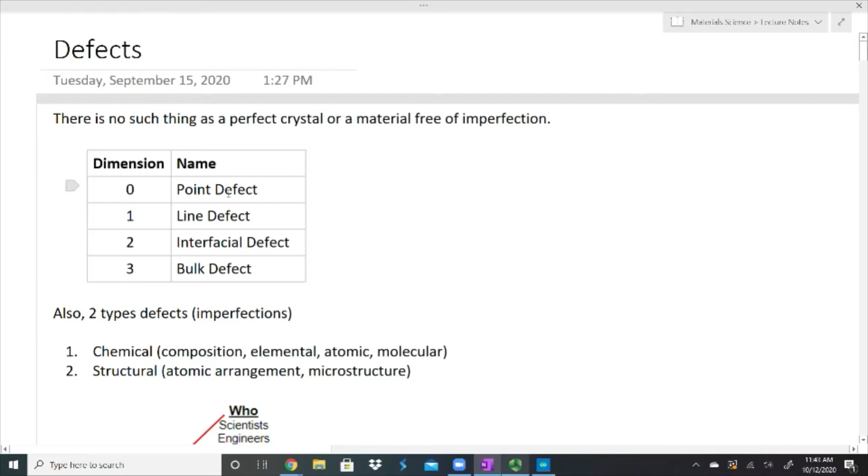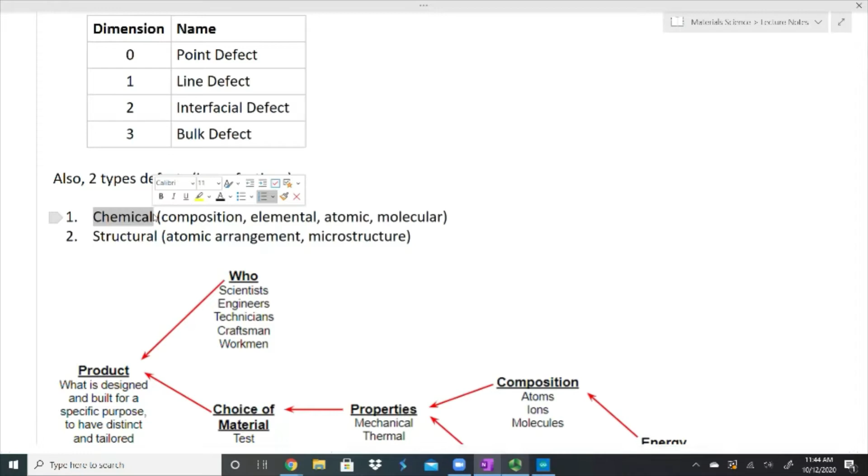There are 4 dimensions of defects that we're going to talk about. 0-dimensional are called point defects, 1-dimensional are line defects, 2-dimensional are interfacial defects, and 3-dimensional are bulk defects. Within these, there's 2 other types of defects or imperfections, and those are ones that are chemical. That would deal with the composition, the element, the atoms that are used, the molecules that are involved, and there are those that are structural, talking about the atomic arrangement or the microstructure.

So we're going to go back to this picture again. We have the composition of the atoms is important, and that's for a material in general, along with the atomic arrangement. But these also play a huge role in defects as well, not just the material in general, but also in the defects of the material. We have to talk about the composition of the defect. We have to talk about the arrangement of the defect. And again, all these things really come back to energy.

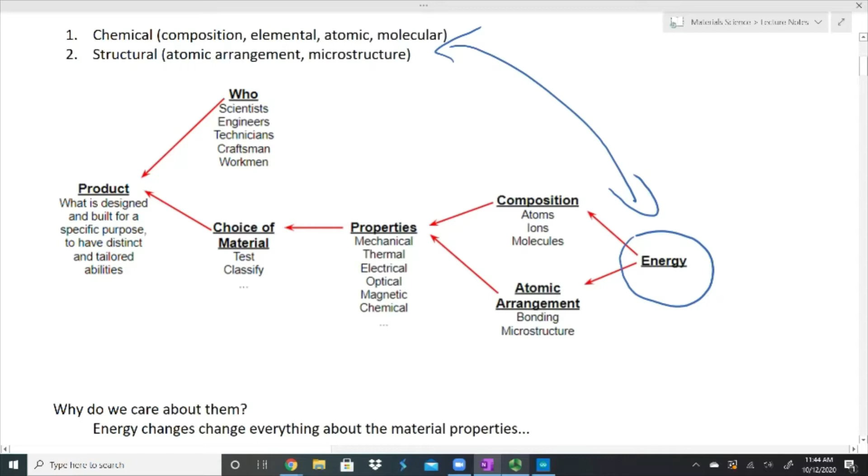The defects, whether they're chemical or structural, will change the energy of the material, which will change how the material properties work. And that's why we really care about them, because the energy changes everything about the material. A lot of times when you think about defects, you think, oh, those must be bad. But defects aren't always bad. So the more we understand about defects and how it changes the energy of the material, the more we can actually add imperfections or defects on purpose. And this gives us specific tailored properties.

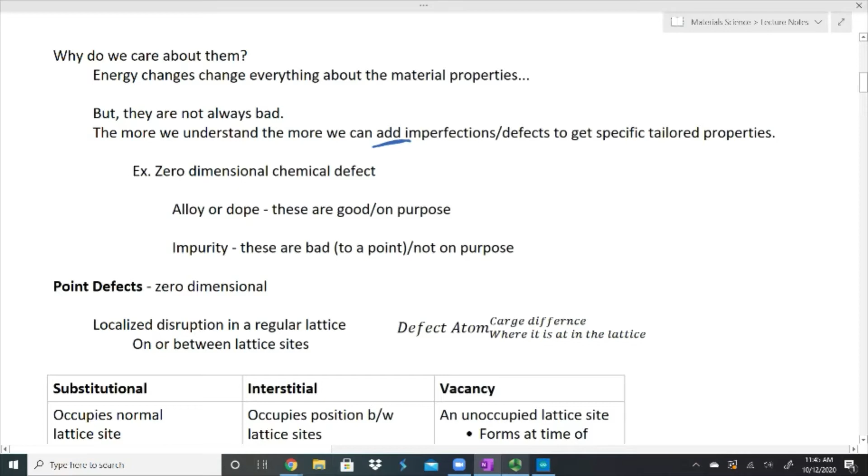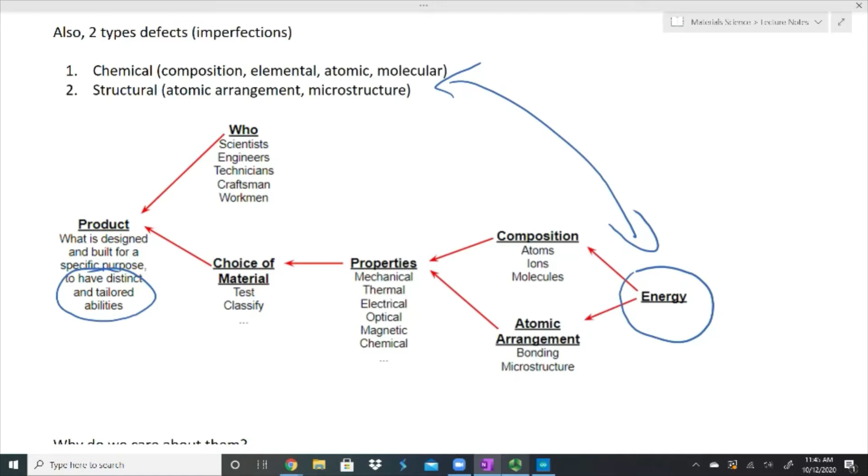Again, that comes back up to this picture about what we really want. We want very specific things out of it. When we design any type of product, or when we design a material, we want things to be very, very, very specific. An example of this, and I know that we haven't gone into it yet, so you might be unsure about some of these things that we'll be discussing in this example, but you can always go back to this and think about it once we have discussed it.

An example would be a 0-dimensional chemical defect. A good version of that would be something that's alloyed or doped. We do this on purpose. We alloy metals. I can have a metal and sprinkle in a little bit of some other atom, a different type of metal, and it's going to change the properties. It'll change everything from the melting point to its strength to its electrical properties. It changes everything.

An impurity, that is when we say that it's bad. We try not to do this. We try not to do it on purpose. And depending on the material, there might be a level of impurity that might be okay to have up to a certain point. But again, when you're talking about so many different atoms throughout an entire material, you're going to have some type of imperfection. You try not to. They're not on purpose, but you're always going to have some.

All right, so let's actually talk about what some of these things are. So the first thing we're going to talk about is point defects. Point defects are 0-dimensional. They are thought of as a point. They're a localized disruption on a regular lattice, or it sits between lattice sites. And I'll draw a couple pictures of that in just a minute. I did want to very quickly talk about some notation. When you talk about a 0-dimensional point defect, what you do is you write out the defect atom, and then as a subscript, you write where this is on the lattice, and then as a superscript, you write whether there's some type of charge difference involved.

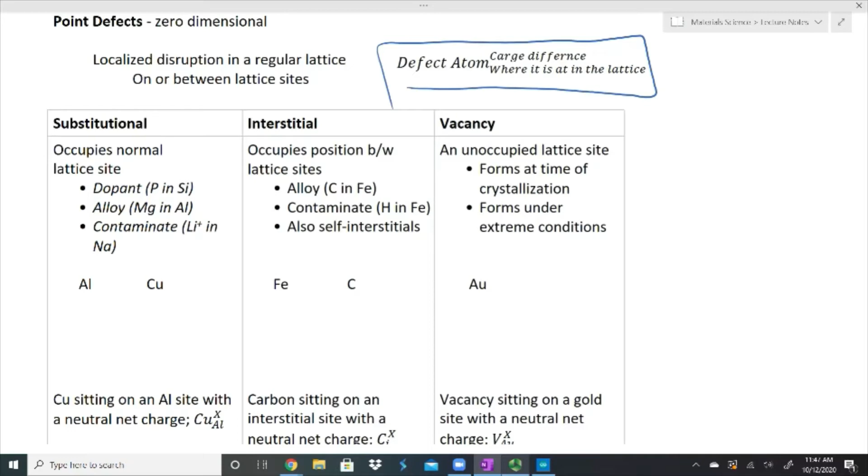So let's talk about substitutional first. A substitutional means that this is going to occupy a normal lattice site. It's not like we're adding anything in here. It's going to sit on a normal lattice site. This would be our dopant or an alloy, or in the case of our example above, an impurity, a contaminant. And so I have a couple things here for the dopant. We might have phosphorus into silicon, an alloy might be magnesium into aluminum, or a contaminant might be lithium into sodium.

All right, so the example that I'm going to show here, I'm actually going to draw one. We're going to have aluminum, and the aluminum I'm going to draw just as an empty circle, and copper I'm going to draw as a filled circle. And so if I have an aluminum lattice, this is a pure crystal.

But if I were to substitute any one of these aluminums and put a copper in instead, this material would still be aluminum. It's mainly aluminum. It does have a contaminant or an alloy or something in there. There's something in there that's not supposed to be for a pure aluminum lattice. And so what we would say is that a copper is sitting on an aluminum site with a neutral net charge.

So again, if we're talking about the notation here, we have our copper atom. That is the main thing that we're writing here. The subscript is where it's at. It's at an aluminum site. And there is no change in charge because a copper atom is neutrally charged and an aluminum atom is neutrally charged. So there is no charge difference. So that's substitutional. Strictly, we just replace one for the other.

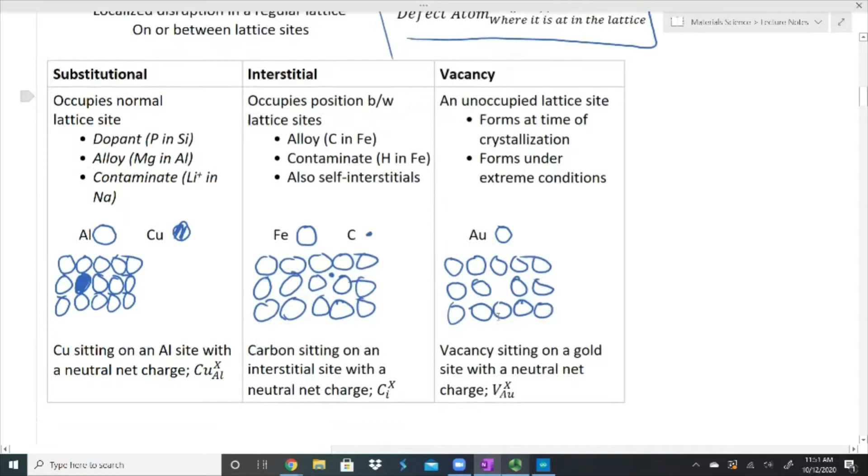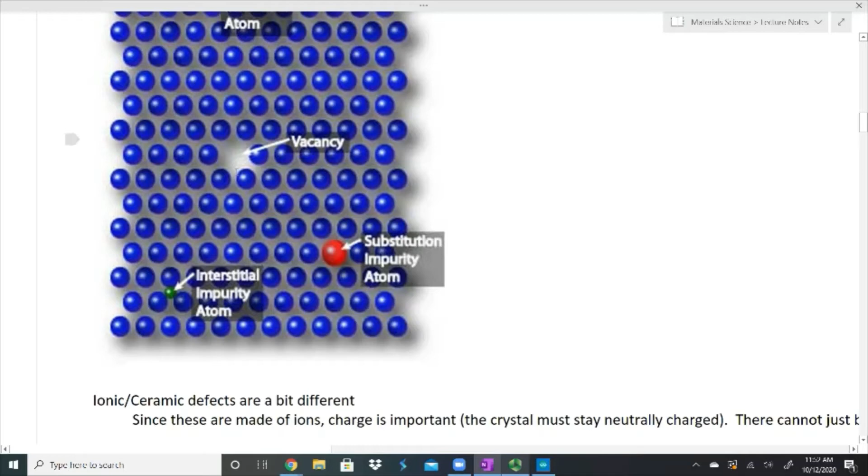In the middle, we have our vacancy. There should be a blue atom there, but there's not. And up here towards the top, we have our self-interstitial. It's still a blue atom, but we've wedged an extra one in here, and so it's not necessarily sitting on a perfect lattice site. And it might be hard to see, but if we try to draw a line through any one of these directions, I could draw a line this direction, which works out. But if I try to draw one up this way, we see that these aren't necessarily lining up. There's some stuff there that are not in the proper spot. And so we have some stuff not sitting on a lattice site. That would be an interstitial, and because it is the same atom as the rest of the lattice, it is a self-interstitial.

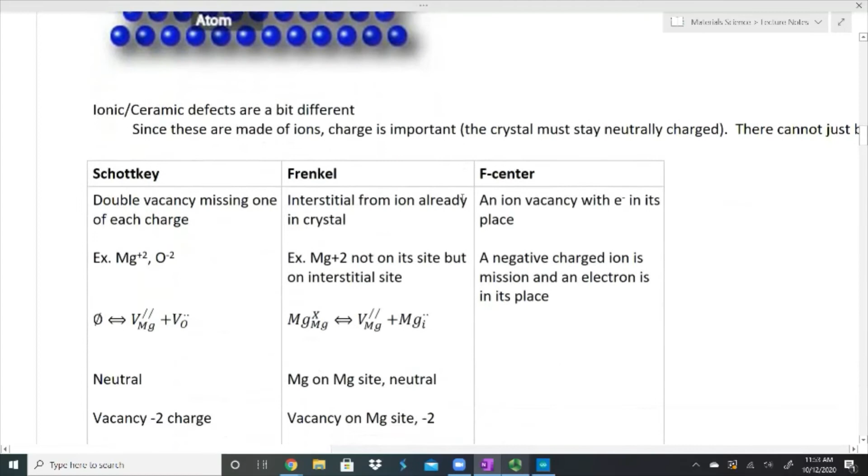They're pretty simple in metals. If we're talking about ionic materials or ceramics, they're a little bit different. We're going to just go through this really quickly. I'm not even going to discuss the notation necessarily. You can look at this notation. We have the same type of things.

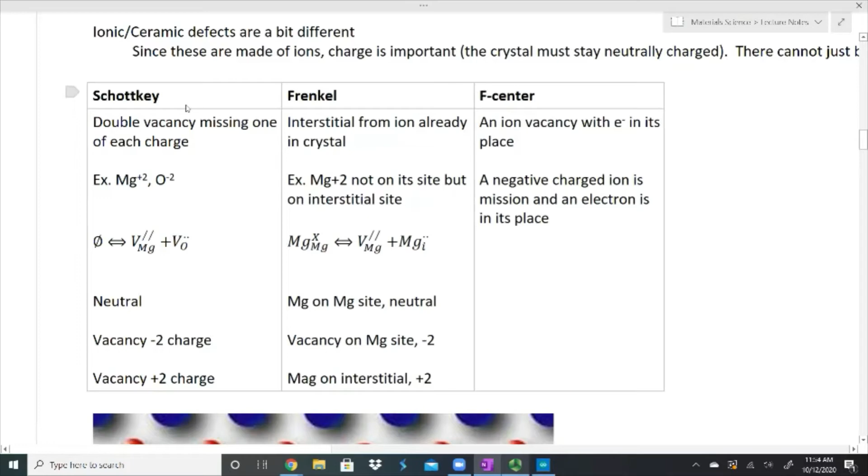We have the Schottky. That's a double vacancy, and the reason we need a double vacancy is because we need a neutral material, and since ionic materials are made up of charges, I would have to have equal charges missing on both sides. So in this case, a +2 and a -2 both need to be missing so that the material is still neutral. So double vacancies, the vacancies come in pairs. We have the Frenkel. These are interstitial.

Same idea. We again need to make sure that we have a neutral atom by the time that we're done with this though. And so we can have an interstitial, but we'll need a vacancy somewhere else to make up for the fact that we've put some extra charge in the material. We have to take some charge out somewhere else.

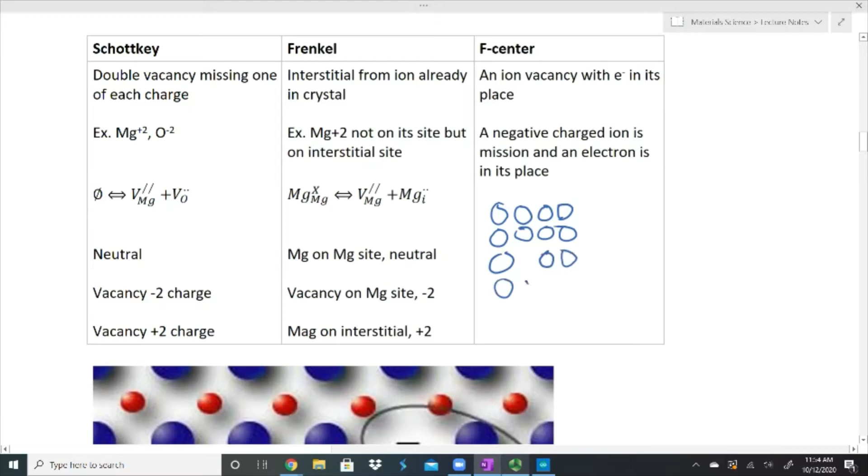And then we have what's called an F-center. An F-center is going to be when we have positives and negatives, right? Because that's what we always have. So positive, negative, every other one is a positive, and this is how an ionic material gets made, which means I have my negative ions here. I should have a negative ion in this spot, but I don't, let's say. To make sure that we still have a neutral atom, instead of having a negative ion here, I could just have an extra electron sitting there. The material is still neutrally charged, which is what we need for it to be stable. But our negative charge is coming from an electron rather than a negatively charged ion.

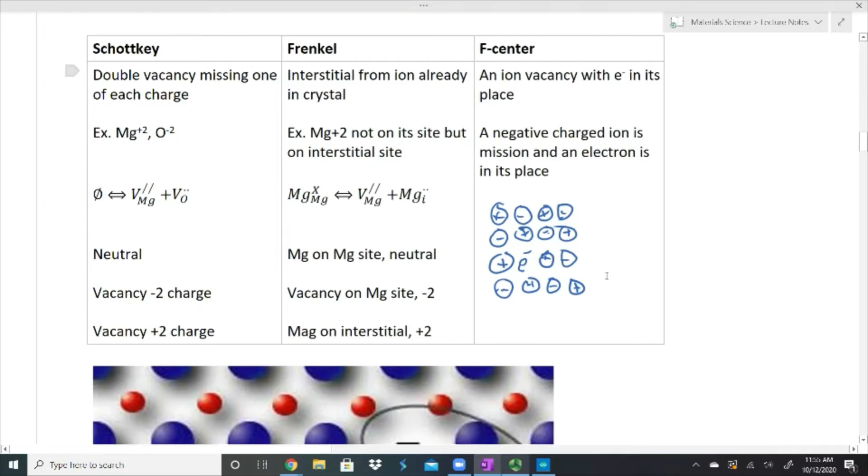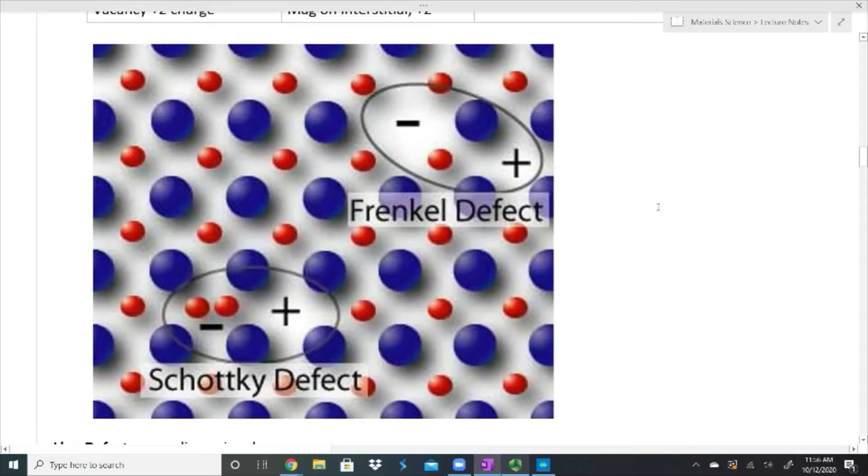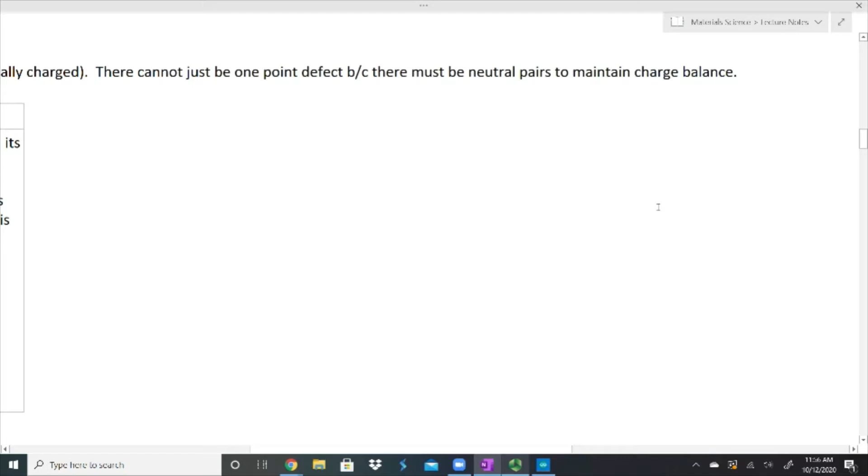And so for ceramics, it's a little bit different. I know I went over ceramics quickly. We're not going to talk about ceramics as much, but I did want to introduce it. So if ceramics interest you, there was some extra stuff here, just about how we have to make sure that we have neutral pairs to maintain charge balance. You can look back and do a little bit of studying on it yourself with a quick picture of what's going on.

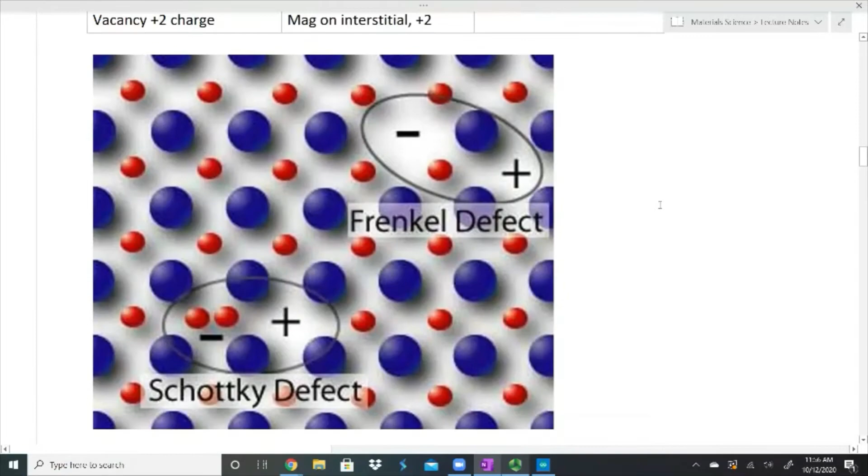The one that we're actually going to probably spend the most time on is talking about line defects, and these are one-dimensional. There are two types, and I know I have three things here. The first one is called an edge dislocation. The second one is a screw dislocation. The third one is just a mix. It means that we could have both of them, so it's not necessarily a third type. It just means that we could have both of these in the same material. And we'll get to what dislocations are in just a minute, but the overarching question is, what do dislocations do within a material?

I want you to have that in the back of your mind while we describe what these line defects, these dislocations, are. First off, I do want to say that there are theoretical strengths of materials, such as a yield strength, versus what we actually measure for that strength. There is about a 10 times difference. Our measured strength is 10 times less than what we thought the theoretical strength should be. We could theoretically figure out how strong a material is, because a material is just as strong as all of its bonds. And so we could sum up all the strength of the bonds and get a number. What we're actually getting when we take a measurement is about 10 times less than that. So it's very interesting, and it has to do with edge dislocation.

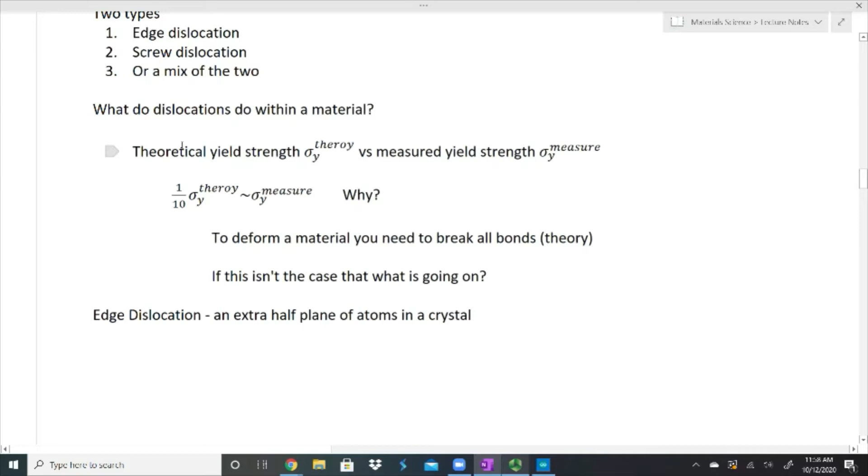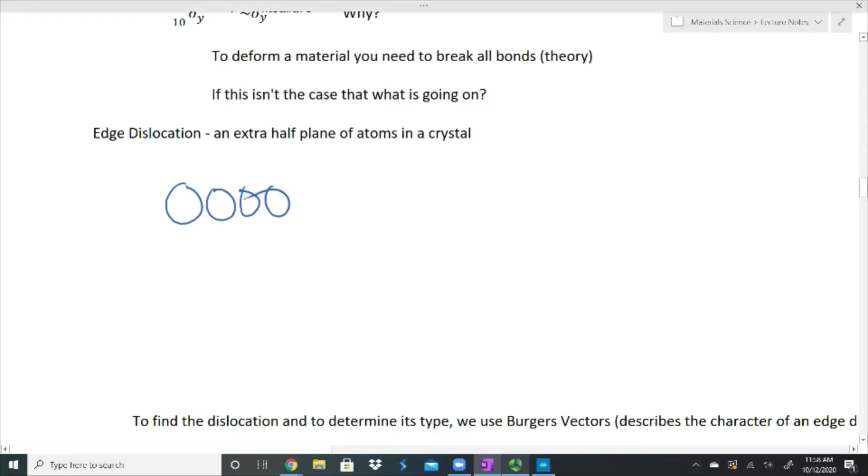So that's kind of why I wanted to put this out there while we talk about what a dislocation is. All right, so an edge dislocation is simply an extra half plane of atoms within a crystal. Here's my crystal. This is a perfect crystal. It's a 4x4, everything's nice, everything's sitting at a lattice point. If I put an extra half plane somewhere in here, I have to move some things over to fit this in. I would wedge them up into here. I'm going to change the color real quick. I would put some atoms here, and I say it's a half plane.

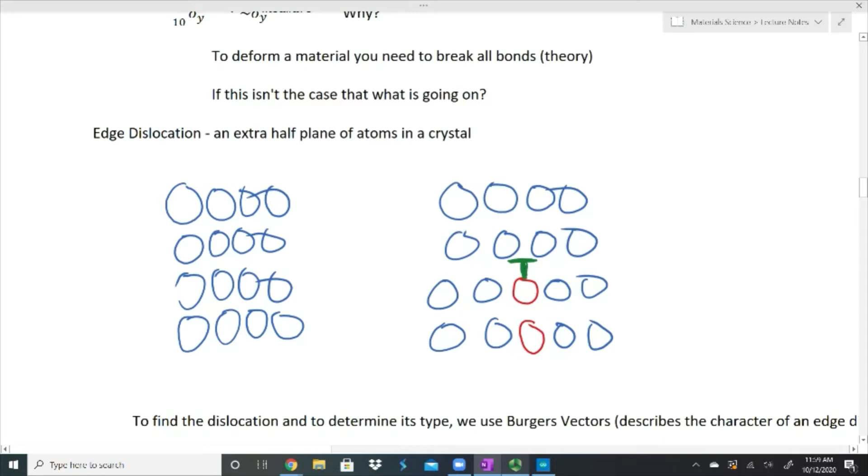Remember that this material is coming in and out of the screen. So I have this plane of atoms that I put in here, and I say that it's only a half plane because it doesn't go all the way through the material. Up here, we don't add that extra part of the plane of atoms. We don't wedge that in there. We have a notation where I put this capital T where this extra half plane of atoms is, where the bottom part of our T points towards that new plane of atoms.

What we can do is find this dislocation, and we use what's called a Burgers vector. It describes the character of our dislocation, in this case, our edge dislocation. So I have my lattice here, and if I start at one point, if it's a perfect crystal, I should be able to draw a circuit and finish wherever I started. If I go up 4, to the right 4, down 4, and to the left 4, I should finish at the spot that I started.

So let's go ahead and do that. I go up 1, 2, 3. I don't have enough, so I'll actually just go up and over 3. 1, 2, 3, 1, 2, 3, and then back 1, 2, 3, and I start and stop at the same point. That shows me that I have a perfect crystal.

If I do the exact same thing here, I'm going to start and go up 3, 1, 2, 3, over 3, 1, 2, 3, down 3, 1, 2, 3, and then over 3 again, 1, 2, 3. We see that I don't start and stop at the same point. There's a gap somewhere, and the reason there's a gap is because we have a dislocation.

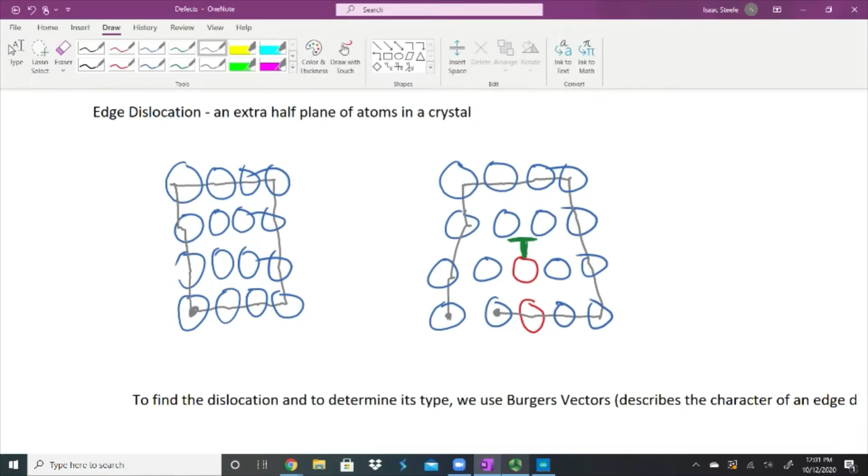If I were to then draw a vector from where I started to where I stopped, some people draw it the other way around as well. Some people are sticklers about it. Again, because the orientation of the crystal doesn't matter, I could have drawn my circuit in the opposite direction. The important part is I have a vector. In this case, it's going right to left or left to right. This is my Burgers vector. We write that with a B and put our little vector sign above it. And that's a Burgers vector.

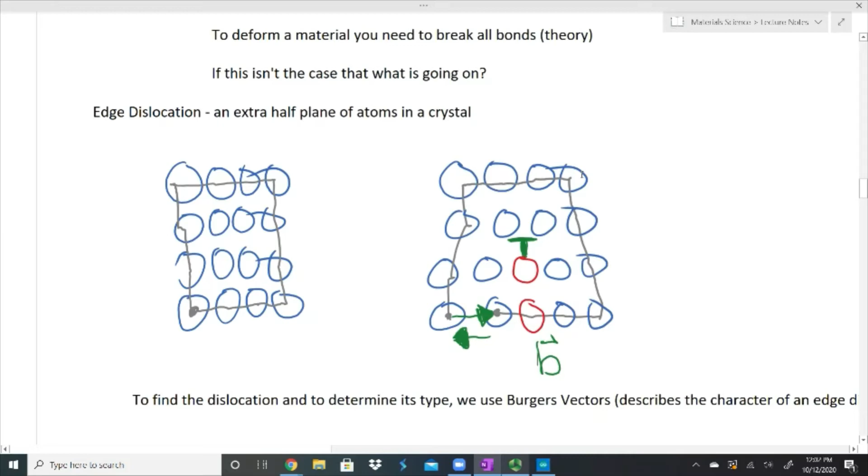And really all it's doing is telling us what's going on within our material, where our dislocation is. It tells us that our dislocation is somewhere that encompasses this circuit that we drew. So we can do it a couple more times. I have some lattices that I've written out here. We're going to draw a circuit. We've got to make sure that we have the same number of units in each direction.

And if it's a perfect crystal, there is no Burgers vector. And if there is a dislocation, then our beginning and end should not line up. So up 1, 2, 3, 1, 2, 3. I could do up 4, I could do up 5 and over 4 and 5. It really doesn't matter as long as I'm consistent. So again, I start and stop at the same spot. In this case, up 1, 2, 3, 1, 2, 3, 1, 2, 3, 1, 2, 3. We have our Burgers vector right here.

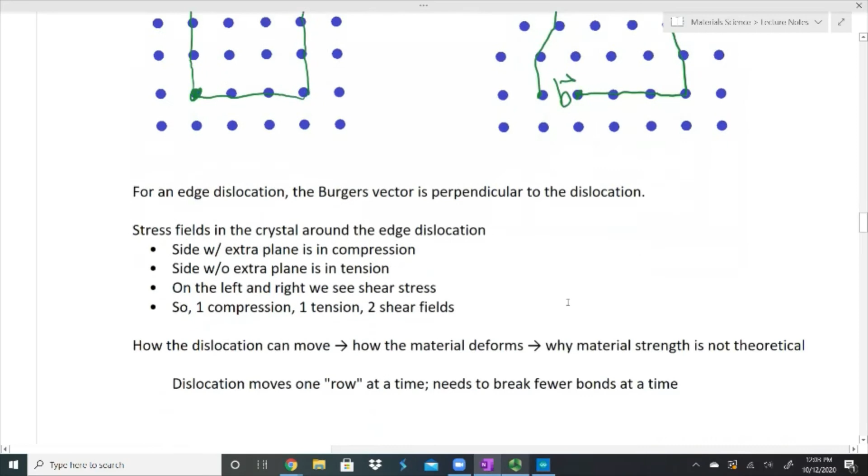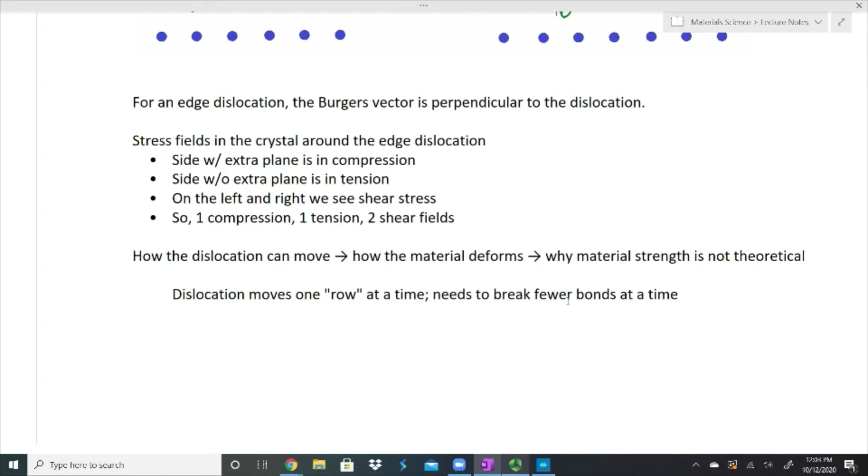All right, so for an edge dislocation, remember there's a couple types of dislocations. This one is an edge dislocation. The Burgers vector is perpendicular to the dislocation. So the dislocation is right here. Remember, I can write it with this capital T, where the bottom part of the T is pointing to this extra bit of planes that I've wedged in there. My Burgers vector is going left to right. And here I say that the Burgers vector is perpendicular to the dislocation.

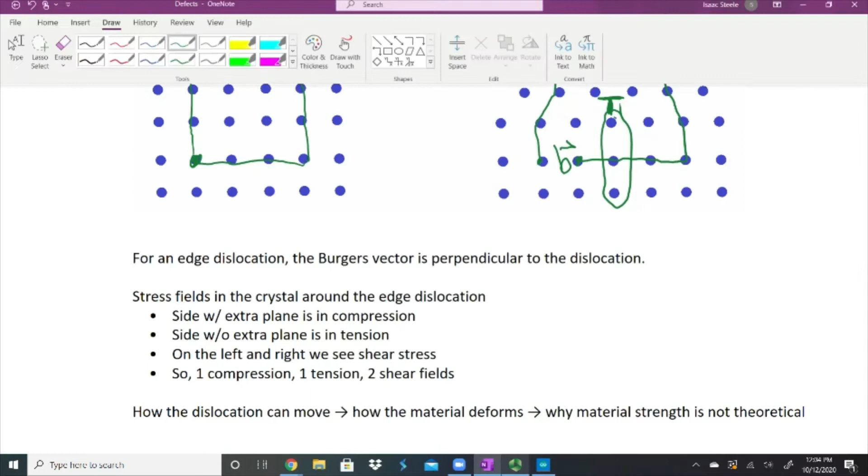The dislocation is a line, and this line is coming in and out of the screen. This kind of looks like I just have this point where this is happening, or you could say the line is this extra plane of atoms that I've circled in here, but really the dislocation is the line that comes in and out of the screen. It's just at this very top part right here. It goes into the screen and comes out of the screen, and just that very top atom, where this T is pointing to it, that is the line. So if I have this line coming in and out of the screen and a Burgers vector going left to right, those are perpendicular to each other.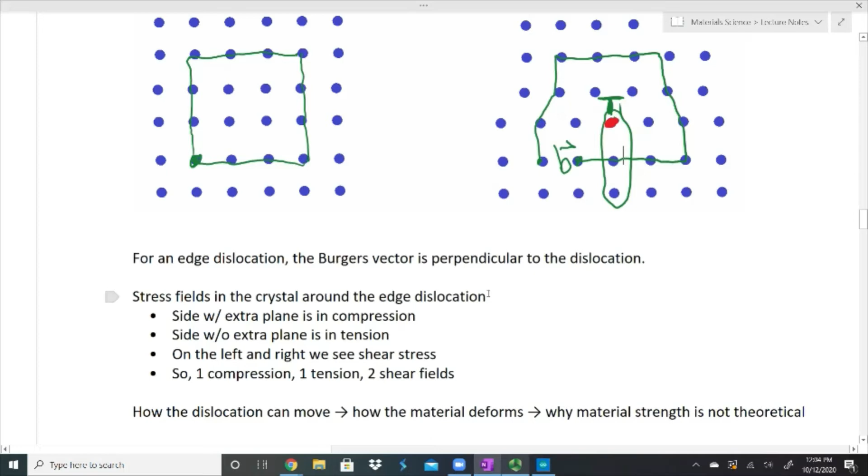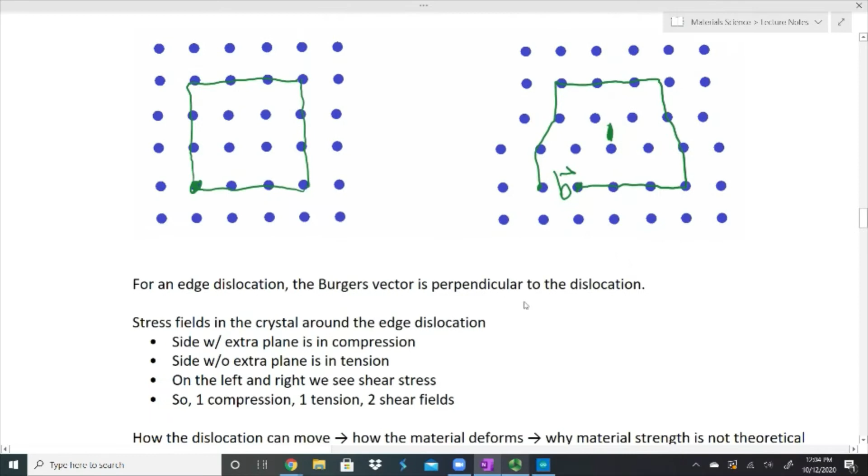There are going to be some stress fields in this crystal. Let me take this circuit away really quick. I have some spots here where I've wedged in an extra plane, which means these ones on the bottom here are going to have to be compressed a bit, right? Because I'm wedging more stuff into a smaller space. I kind of have it spaced out so that it's easy to see, but I did wedge in an extra plane of atoms here, which means those are going to be compressed. And if those are compressed, these ones are going to try to be pulled apart. So these ones are in tension.

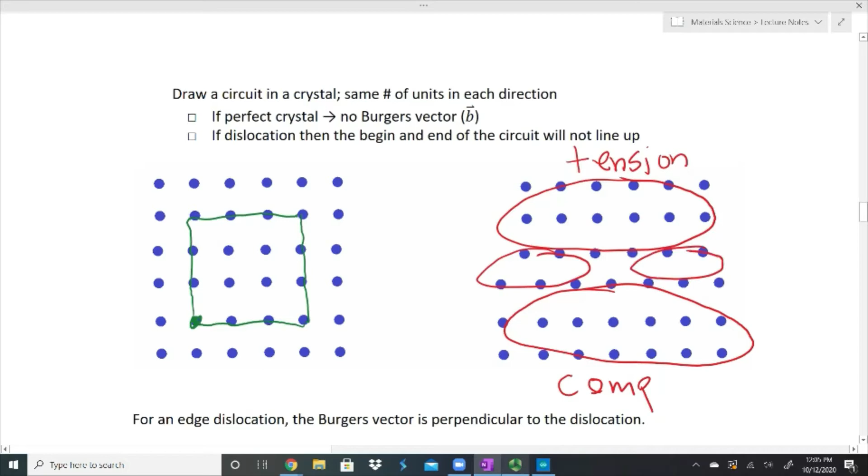So some that are trying to be pushed, they're being compressed. The other ones are kind of being pulled apart a little bit. And then we have the ones on the side here. And here we have our shear. These ones are kind of being pulled at an angle. And so it is important, and we'll get into this a little bit more when we talk about mechanical properties, and we talk about things being in compression or tension or shear. But it is something that I just want to note here.

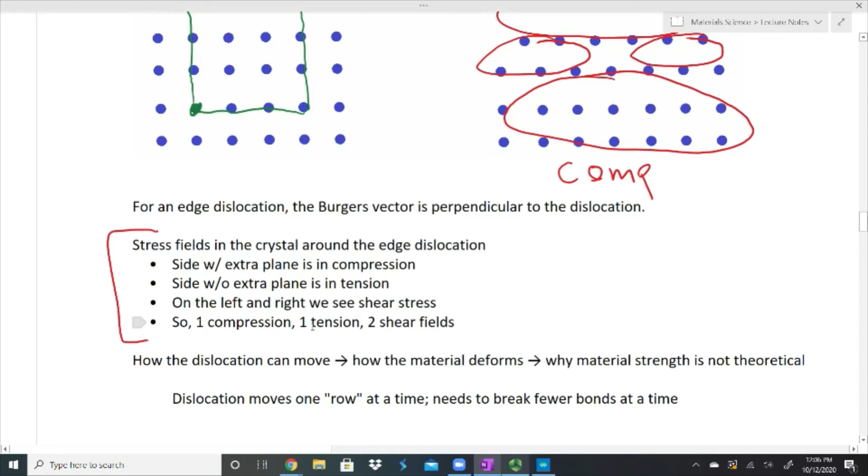Inside of this, anytime I have a dislocation, the side with an extra plane is in compression. The side without the extra plane is in tension. And on the left and the right, we have shear stresses. And so altogether, we have compression, we have tension, and two shear fields within just this simple small portion of

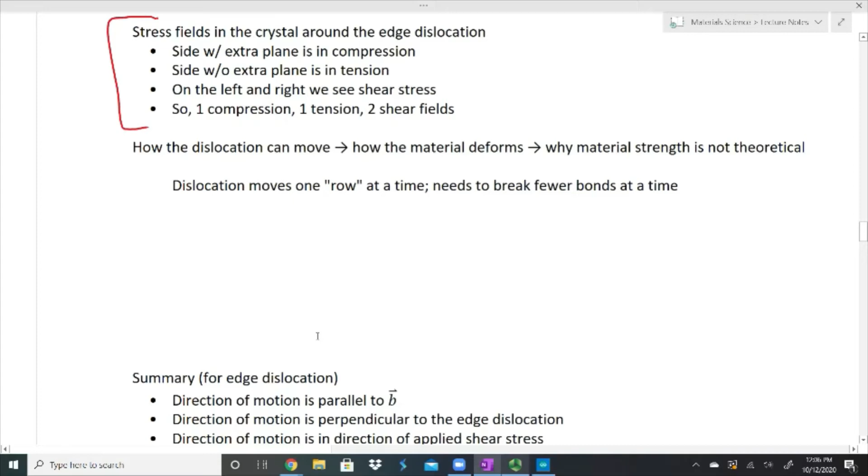our lattice. Now, going back to this original question that I asked way up here about why our material's strength isn't what we thought that it would be. In theory, we don't see that when it's measured. It comes down to the fact that this dislocation has the ability to move. And it moves so that the material deforms, or it's how the material deforms, and it's why this strength isn't theoretical. Instead of the material having to rip apart all at once, this dislocation allows it to move one row at a time. It means that we have to break fewer bonds at a time.

So let's say that I have a lattice like this, and I have this extra plane of atoms kind of on this left-hand side, and I give this a push. So I kind of give it this shear push. I push on the bottom in one direction, I push on the top in the other direction. What I'm going to do is I'm going to push this closer. This is going to get pushed in a little bit, and what I have to do is I can break the bonds right here at the very, very beginning. Just one set of bonds. I don't have to break all the bonds all at once. And when I do that,

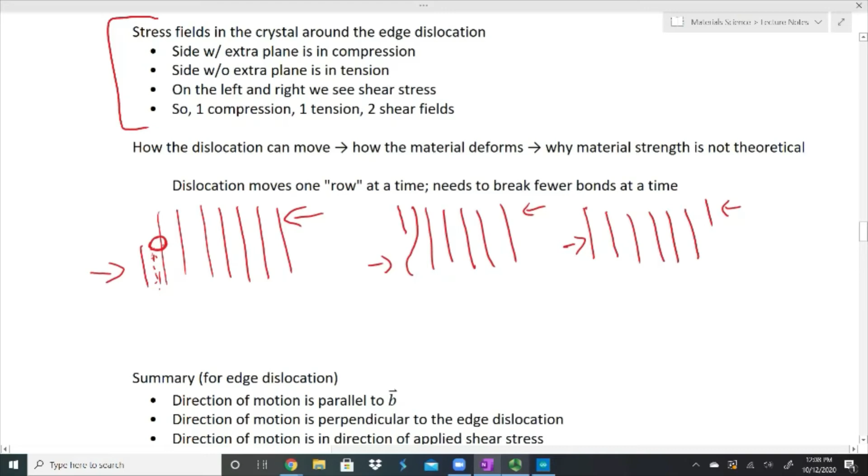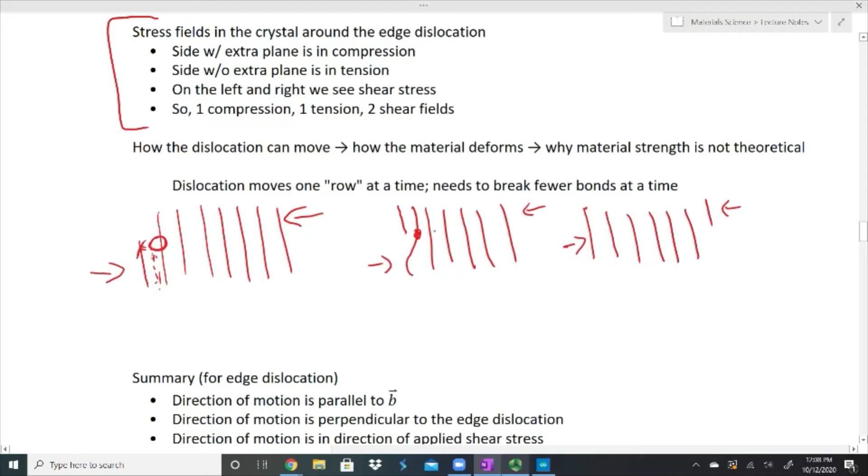my material does this. And if I keep pushing, it's going to keep moving through the material, and eventually it will end up on the other side. I have some better pictures down at the bottom, so we'll be able to talk a little bit more about how this moves. But what it's really doing is it's just moving one step at a time. When I push this over, one bond breaks, or a line of bonds breaks. Right here, it reattaches where that broke, so this new spot reattaches, and then it just does it again. We keep breaking one set of bonds and pushing over, one step at a time.

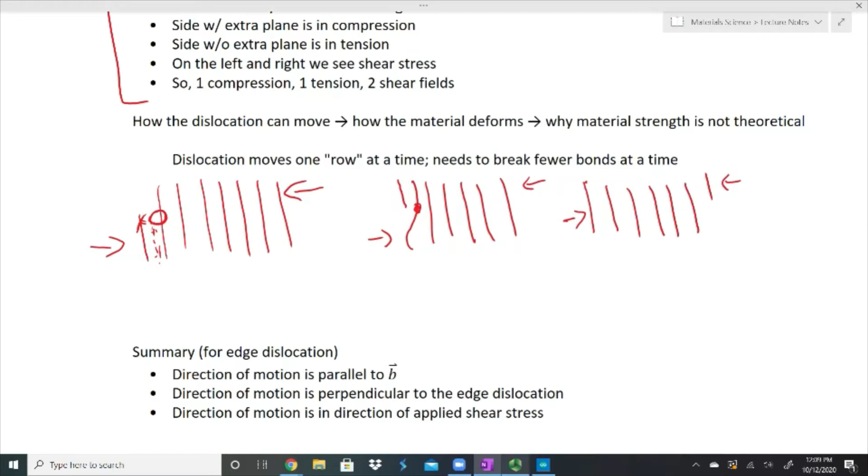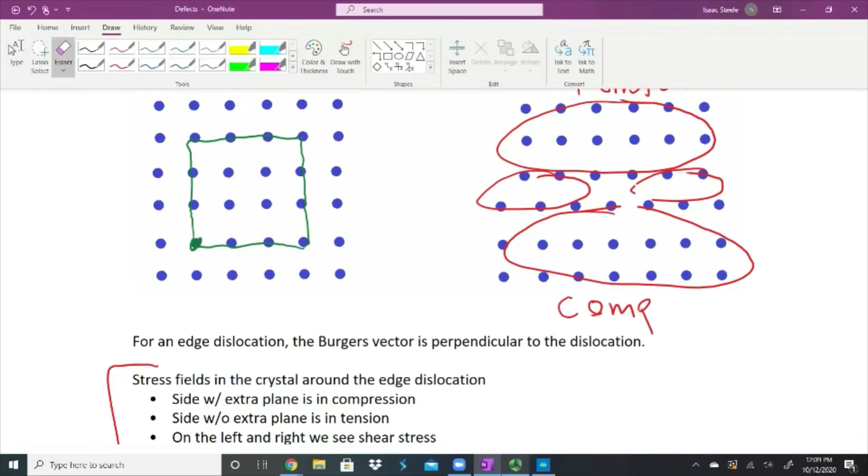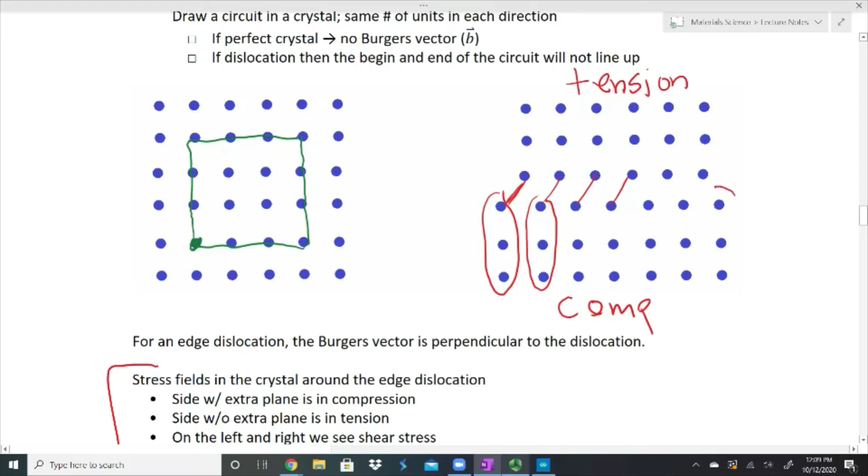So I do have a summary for the edge dislocation, and this again will take time to think about. The direction of motion is going to be parallel to my Burgers vector. And so let's go back up to this picture here. All right, so we can look at it here as well, look at things move. If I were to push this, I could push this so that it bonds here, which means that this is no longer attached, but as I keep pushing it, it will attach, and it will slowly push things over until this is no longer attached and it's kind of sitting off by itself. So there it is, kind of from our lattice perspective.

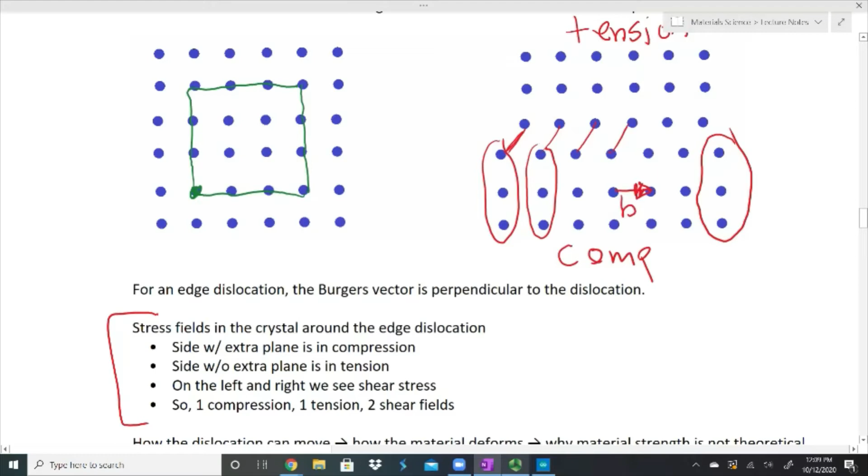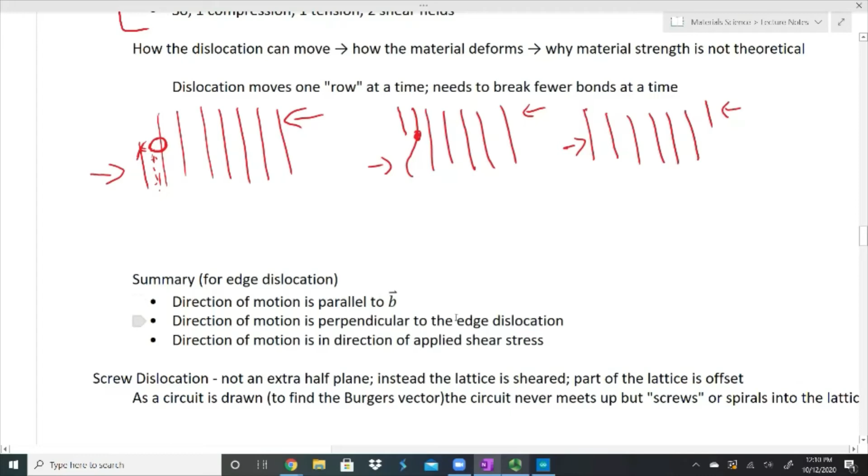And the reason I wanted to show this one is, remember that I had my Burgers vector that went right to left. So there's my Burgers vector. So the direction of my dislocation, my movement, is parallel to my Burgers vector. The direction of motion is perpendicular to the edge dislocation, and the direction of motion is in the direction of the applied shear stress. So I apply my shear stress, I push this material together, and that is the exact same motion of my edge dislocation. So the edge dislocation moves in the direction parallel to the Burgers vector, perpendicular to the edge dislocation, and in the same direction of the stress that I apply it in.

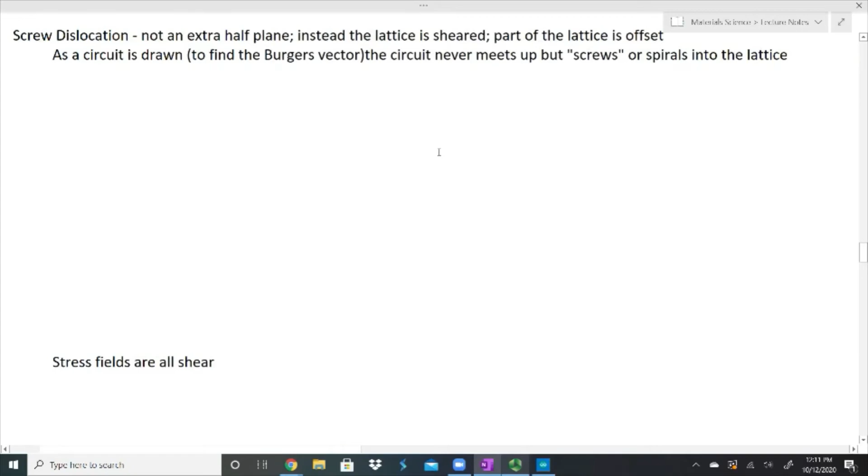All right, screw dislocation. It's not an extra half plane. Instead, it's that the lattice is sheared. Part of the lattice is offset. And so we're still going to draw a circuit, but the circuit's never going to meet up. It's going to spiral. Now this one's much, much harder to draw. I'm going to try drawing it a couple times, then I'm going to show you an actual something from a book so that it's a little bit better.

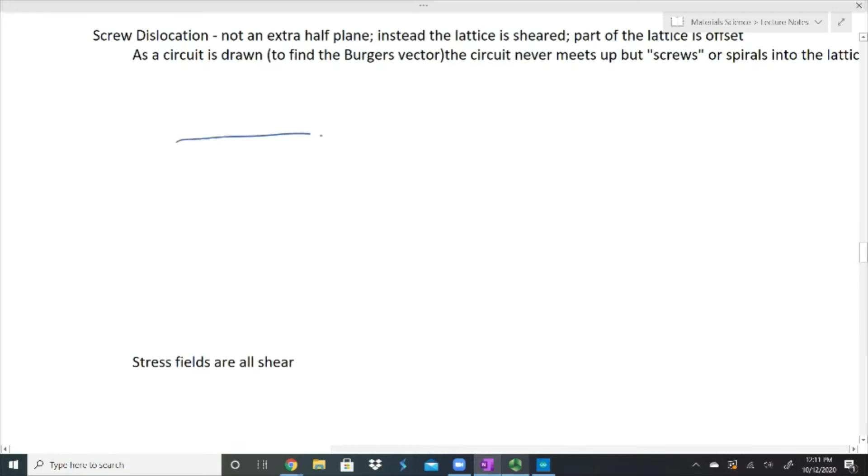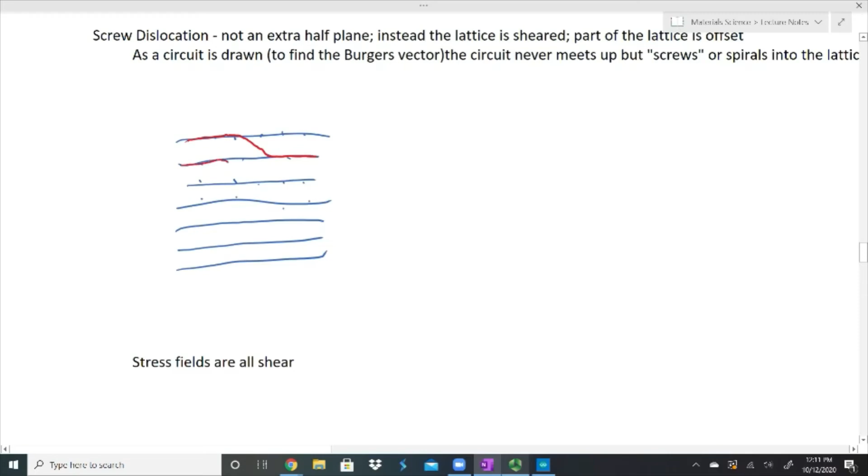Now let's say that I look at a plane of atoms, and I'm looking directly down on it, and they all go in this direction. And this is my lattice site. So I have these dots here, and everything lines up because this is a perfect crystal. Now that is one plane, and materials are made up of multiple planes of atoms. So I put another plane of atoms on top of here, but for some reason, the plane shifts. And so that means that it shifts all the way down.

That's what a screw dislocation looks like, and it's hard to see. So I have a stack here, and everything was going fine. Everything was just going left to right, and then all of a sudden I have a plane that has this little squiggle in it. It doesn't match up perfectly.

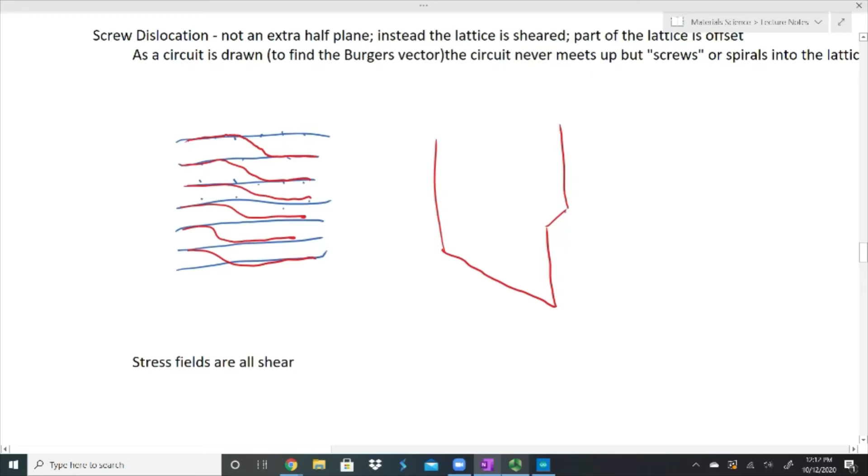Now I'm going to try one more, and I apologize if it ends up not working well, but I felt like I should at least give it a shot. All right. This is my material. So those are my edges. Let me see if maybe adding a second color will help here. This is my three-dimensional material.

And so here on the bottom, I just have a stack of cubes. And the stack of cubes should be perfect. What I have on the top here is another stack of cubes. But at some point, this stack of cubes kind of shifts over a little bit, so that it looks like it's almost starting to unzip. A lot of times I even refer to this as the material unzipping slightly. So the dislocation is right here.

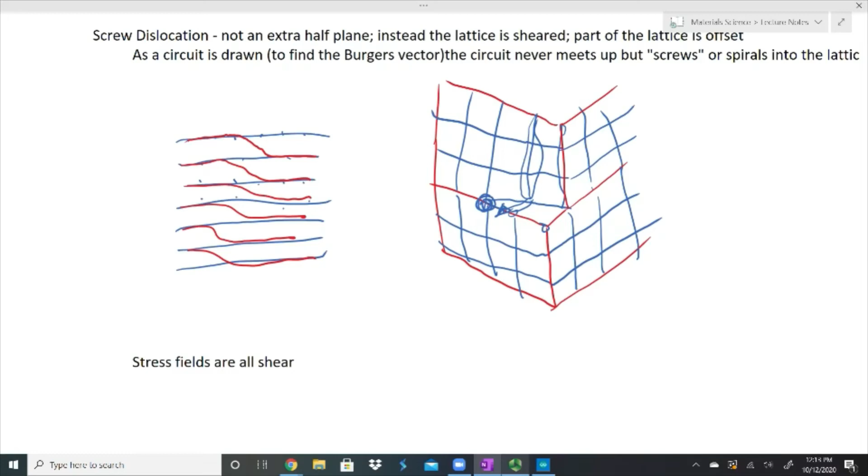It's going to be the spot kind of where the zipper's at, as if I were to pull this zipper, let's say, up this way, it would pull this line over to here, and it would pull this line over to here, and I'd have a perfect stack of these cubes. Like I said, I will show some better pictures here in just a moment. In this, all stress fields are going to be considered shear. There is no compression, there's no tension, everything is shear.

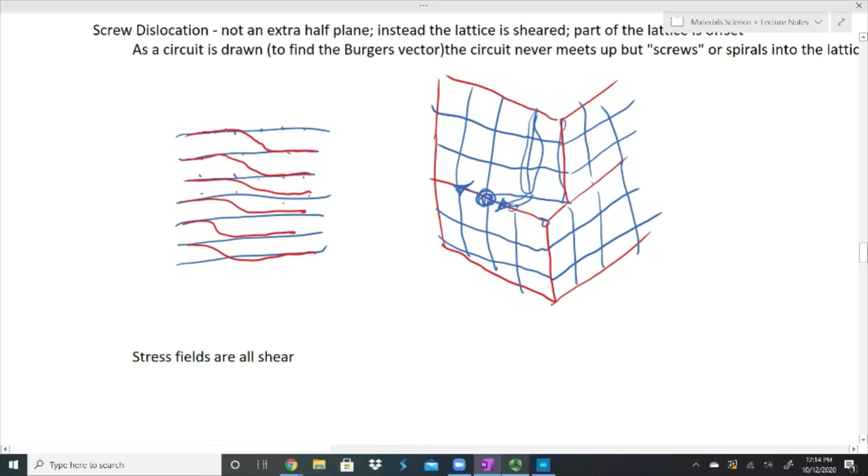I mentioned that this is kind of like a zipper. If I zip this up, then this top set of atoms, this top three-dimensional stack of boxes, since I kind of do this lattice, will shift over. But if I were to zip this down the other way, then this stack of boxes on the top, this lattice, would shift over one. And so if I were to unzip this, I'll go ahead and draw it down here. By the time I'm done, I would end up with something that looks, hopefully, something like this. So if I were to zip it up, it would look like a perfect stack of boxes. If I were to unzip it, the whole thing would shift over.

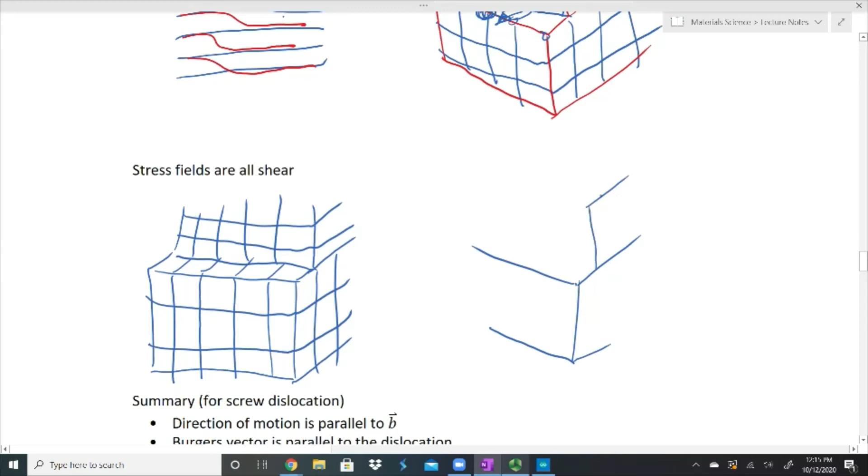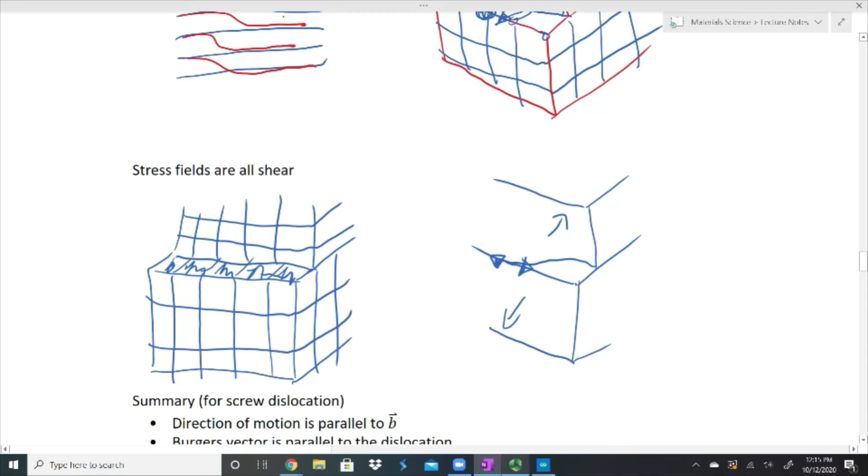Another picture, I'm going to try one more picture again. Hopefully one of these pictures at least ends up working out well. So I have kind of this offset box on the top, and it looks like this. And as I apply some type of force this way, it is going to unzip or zip, depending. It will either push everything out so that I have an entire stack of lattice sites that are now open, or it's going to stack right on top of it so that everything looks perfect. Moved quickly through that. I do have a summary for screw dislocation.

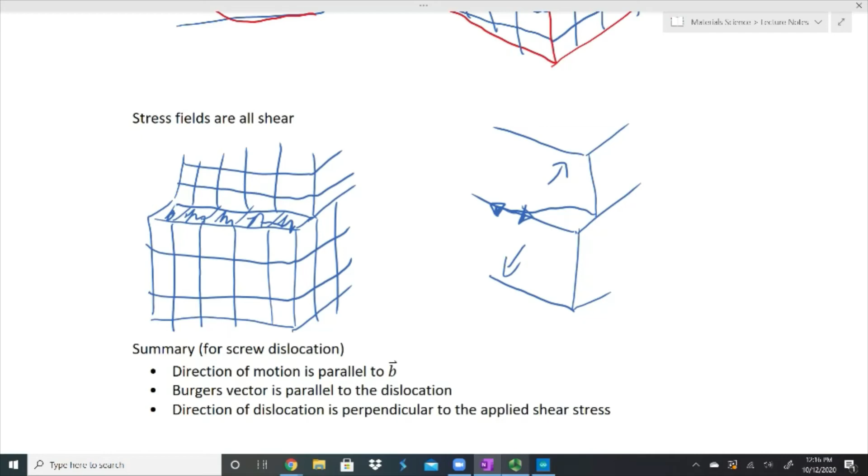The direction of motion is going to be parallel to the Burgers vector. I'm going to draw the Burgers vector for this in a second. I don't want to do it on one of my drawings because my drawings aren't very good here. The Burgers vector is parallel to the dislocation, and the direction of the dislocation is perpendicular to the applied shear stress. All right, so I have this picture here.

And if I apply a shear stress, first let's review the edge dislocation. If I were to push this over and push the bottom one the other way, I'm going to draw an upside down T here for my dislocation, because again, that bottom part of my T points to that extra set of atoms, and the extra set of atoms is pointing up. I draw my circuit around it. I end up with a Burgers vector. That's my edge dislocation, and as I move this, this top part moves to the left.

My screw dislocation's over here on the right. We can see that it's kind of unzipping. We kind of have this spot where it's not lined up and then it lines up perfectly. We would do the same thing. We would start at a given spot and we would go down. In this case, we go down 5, I believe. 1, 2, 3, 4, 5. Then we're going to come forward. 1, 2, 3, 4, 5. And then we're going to go up 5. 1, 2. Well, we're off plane now. We don't necessarily have a plane of atoms there. So I actually have to go in the plane, into my material a little bit so that I can finish going up. 2, 3, 4, 5, and then 1, 2, 3, 4, 5.

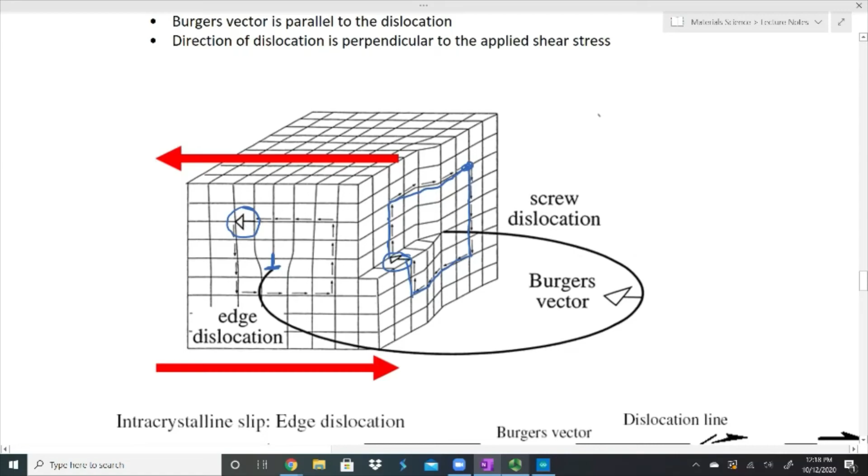Here is a little picture of our edge dislocation. So I have a perfect looking crystal here, but I apply some force. And on this side, I apply a force going the other way. And as I do that, I break bonds. I end up with this extra set of planes. And as I continue to push it, eventually it offsets the entire thing, and I get this picture at the end.

The screw dislocation is when instead of moving the whole top over one step at a time, I'm only going to move part of it. So I just move the front portion at a time, but I move the entire front, right? Not just one length and then have this compression in here. Instead, I pick up this whole front end and I shift the whole front over. And then I take the next line back and keep moving that over until I've unzipped the entire material. The deformation at the end basically looks the same. It's just the manner in which it happens.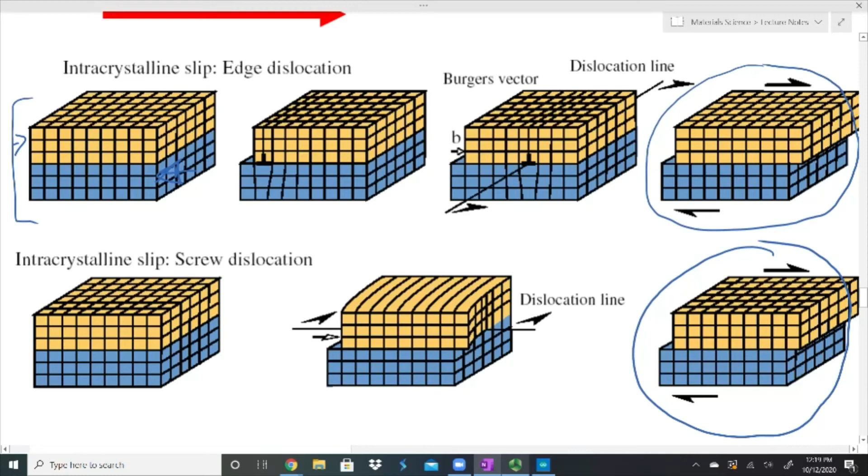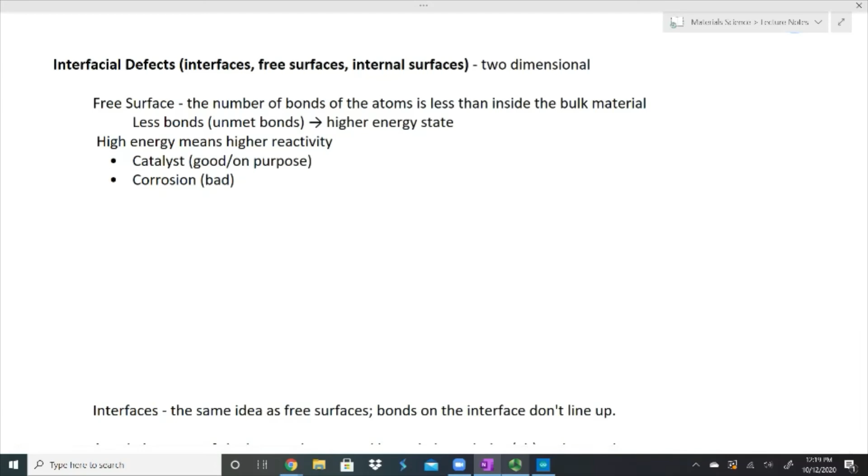All right, next we have interfacial defects. These are our 2-dimensional defects. These are interfaces, free surfaces, and internal surfaces. All right, so a free surface, what we're looking at is that the number of bonds of the atoms is less than inside the bulk material, and less bonds, bonds that would like to be made but aren't, makes it a higher energy state. That isn't necessarily the best explanation, so let me go ahead and draw a quick picture.

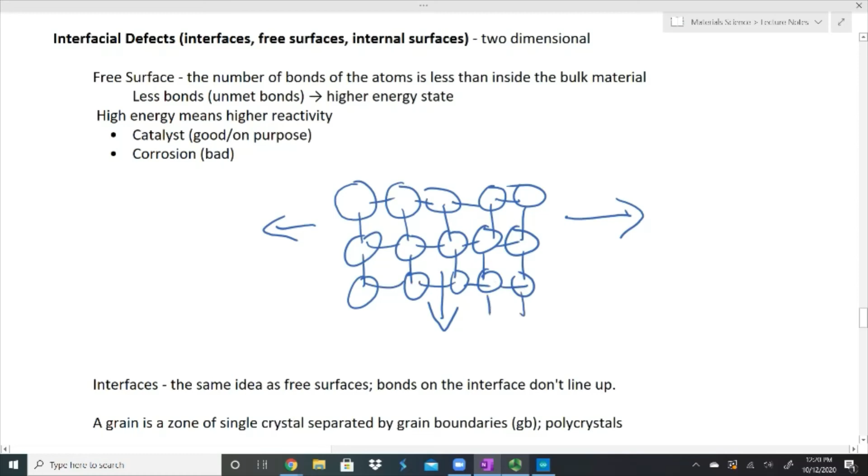Here is my lattice. And again, if this is a perfect crystal, this continues in all directions. But let's say that I have a free surface, just a surface like the surface of your table or something. These all want to bond together. But remember, these keep continuing into the material and to the right and to the left. But the ones on the top, there are unmet bonds here. They want to bond to something, right? They want those extra bonds, but there's nothing there for them to bond to. That's what we mean by a free surface.

This is the same thing that happens with interfaces or internal surfaces. Anytime things match up, but they don't quite bond all the way. And this is why it's high energy. It's seeking that bond, but it's never quite getting it. High energy means that it's more reactive. For some reasons, that's good. We can use this for catalysts. But for other things, it's bad. It means that things are going to be more corrosive.

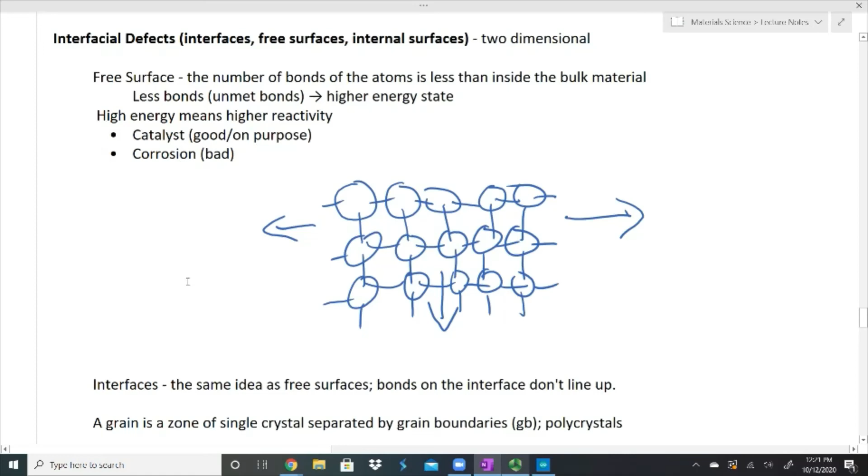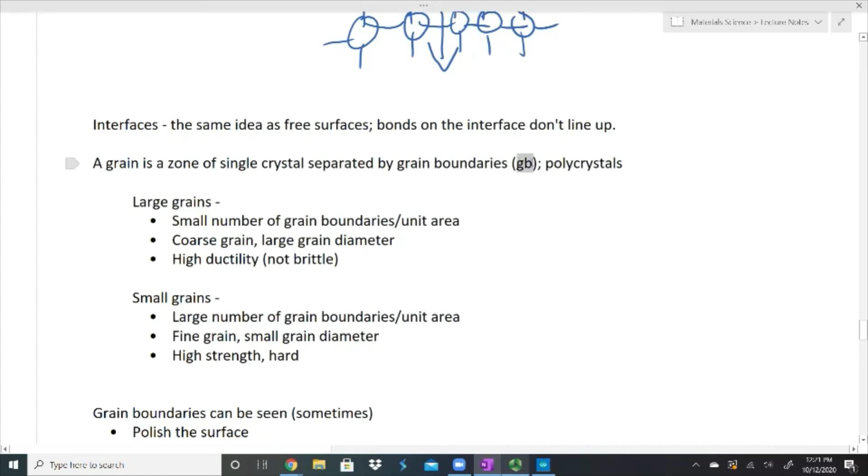Again, interfaces are the same idea as free surfaces, except that they're inside of material, such as grain boundaries. The thing is, the interfaces aren't going to match up perfectly. So a grain is a zone of single crystal separated by grain boundaries, often written as GB, at least for us. And this is when we have polycrystals. If I have large grains, so here's my material, I have one grain that goes that direction, a grain that goes that direction, and some grains that go this direction. And they're pretty large grains.

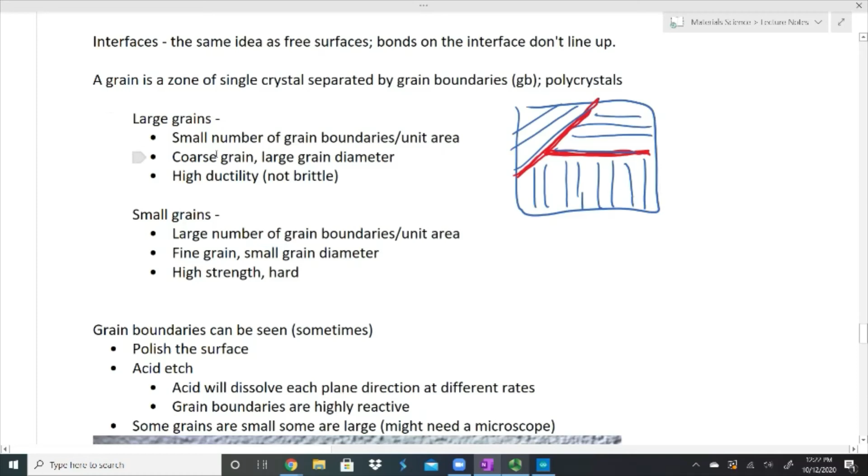If it's large grains, it means that we have a small number of actual grain boundaries. I'm going to draw these grain boundaries in red. My grain boundaries would be here and here, and those would be my defects. Those are my surfaces, even though they're inside a material. Large grains, small number of grain boundaries per unit area, means that it's coarse grain or large grain diameter. And what this does is it makes it a ductile material. Again, we'll talk about that when we get into mechanical properties, but really it just means that it's not brittle.

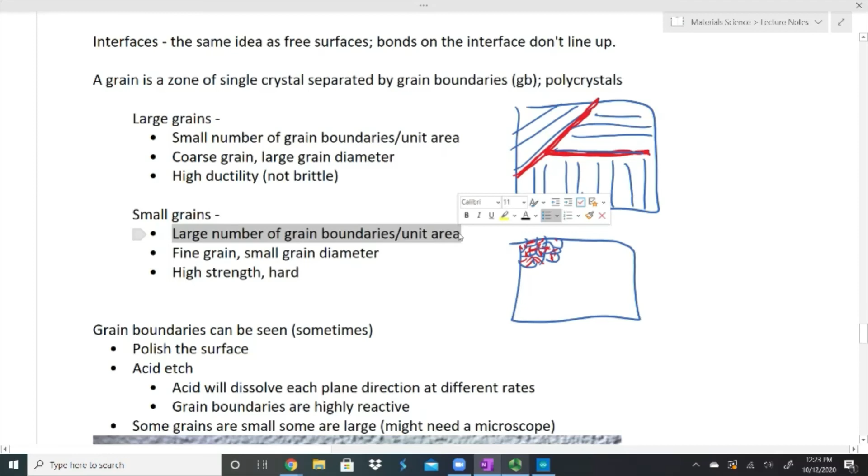If I have small grains, I'm not going to even draw these. I can have these small grains. Each one of these has its own grain direction, similar to these larger ones, but let's say that this one goes that direction, and they're all not quite lining up. Lots and lots of interfaces in here. So if we have small grains, we have a large number of grain boundaries per unit area, or in other words, we have a lot of interfaces in here. We say that it is a fine grain structure, or that it has small grain diameters, and this makes the material very high strength and hard.

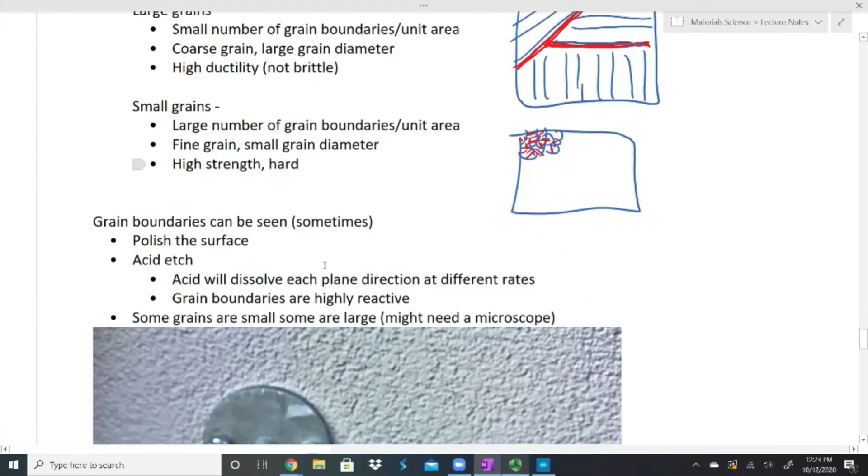Grain boundaries can be seen sometimes. To do this, we can polish the surface of our material. We can acid etch because the surface is going to be very, very highly reactive. We can put a little bit of acid on it. And depending on how the grain boundaries match up, it's going to dissolve each plane, each type of grain slightly differently at different rates, which means that we can see those grain boundaries.

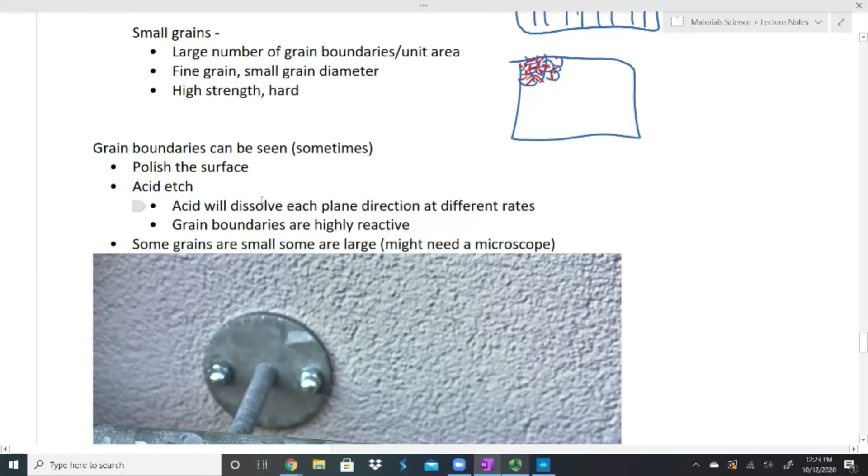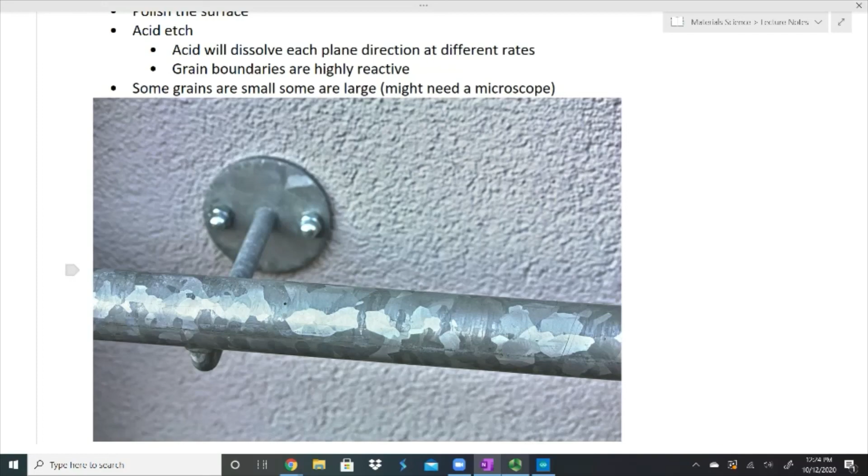And some are really large and you can actually see them without a microscope. You can see in some galvanized materials, you can go out and maybe look at a chain link fence or a flagpole or something, and you might see grain boundaries even just on the surface. They're large enough grains sometimes where we can see it. Sometimes they're super, super small where we would need a microscope. And sometimes, often, we can't see those grains ourselves at all, and we'd need to maybe etch it, or we would need to have some other method to take a look at those grain boundaries.

The last thing I want to discuss is bulk defects. Bulk defects are our three-dimensional defects, and really they come in two forms. Either I have voids or vacancy clusters, big chunks of nothing inside my material, or, going kind of back to Democritus, we want to talk about how he was saying there was voids in being. We could say that I could have this big chunk in my material of some type of being. It is a chunk of some material that really shouldn't be there, at least not as the bulk material goes.

We could manage this. We could put in some type of filler, such as rocks or shells in concrete, or it could be uncontrolled, such as slag in metal. There are some links here that I'm going to try to remember to put in the description of the video, where it talks about the Titanic and why the Titanic sank. They've recovered some rivets from the Titanic, and they have done some testing on them. They found that there were bulk defects in them. And so they measured it and they found where bulk defects were inside of the material.

Now what the bulk defects were on this is to make the steel, you want to make sure that you heat it up long enough to make sure all the slag floats to the top, so you can remove all the slag, all the stuff that you don't want, such as when you take iron ore, there's some sand and there's other things mixed in with it. You want to make sure that that comes off so that you have a more pure material. And if you don't allow that slag to come out, that sand basically turns into a glassy, brittle material. And for a rivet, that's a bad thing. That means the rivet, the thing that's supposed to be holding the hull together, the boat together, isn't going to be very tough. It's going to be able to shatter. And so that's something that we, again, might get back to later. We can talk about it in class a little bit.

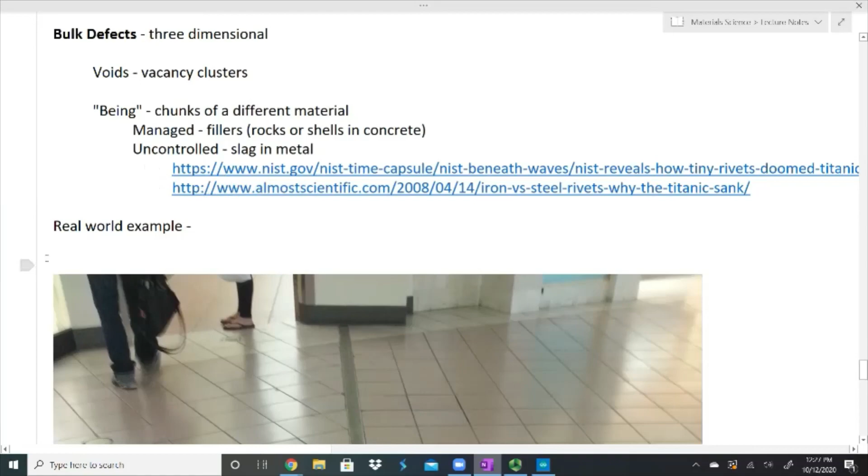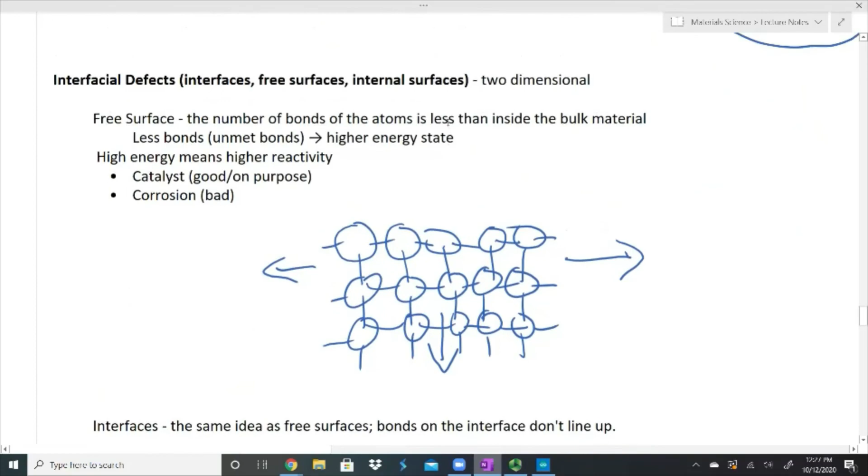But it is an example of a possible reason why the Titanic sank, and getting back to what a bulk defect is, I do have this one picture here of a real-world example. I got sidetracked once when I went to the mall. I was walking, and all of a sudden I just stopped dead in my tracks, pulled out my phone, and took a picture of the ground here. And the reason for it is it's a perfect example of an interface. So this goes back to our two-dimensional structures, or not our two-dimensional, our surfaces, our two-dimensional defects,

where there's some tile that goes in one direction, and if you just look at the right-hand side, it's a perfect crystal structure, and there's some tile on the left-hand side, and again, looking at that by itself, it's a perfect crystal structure, just a bunch of squares. But where they meet up, they don't meet up perfectly. And so we can definitely see where we might have unmet bonds, which gives us our high energy. And so I don't have bonds that match up so that each lattice site has the proper number of bonds and the right angles and all that. It really allows for a spot of high energy in the material. And I also like talking about this because it can show you that looking at the real world, looking at all different types of things, it can really help us understand science, materials, physics, chemistry, and engineering, just kind of by being observant in the world around us.